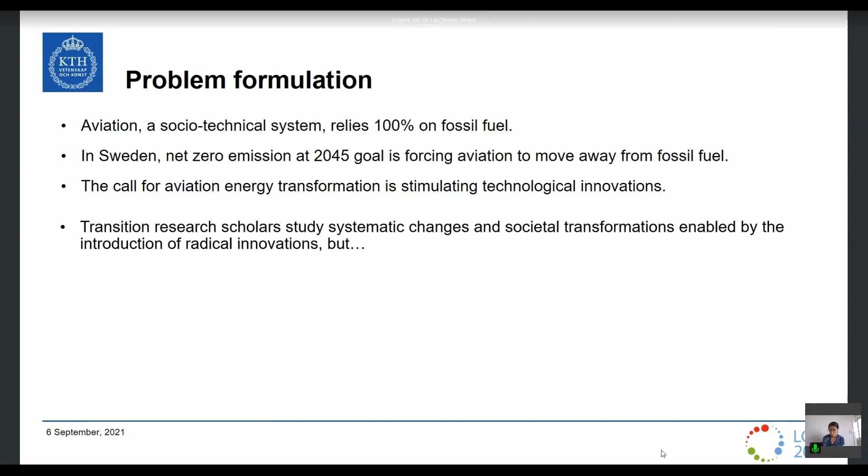With the introduction of new technology comes systematic changes and societal transformations, and these changes are studied by scholars in the field of transition research. But the scholars often implicitly assume sustainability of technology, overlooking questions like sustainability of the transition process or sustainability of any technology when scaled up, as well as potential burden-shifting phenomena.

So LCA as a method could supplement the socio-technical transition perspective by addressing these questions. In return, the socio-technical transition perspective can enrich LCA by introducing different interactions between technology and society.

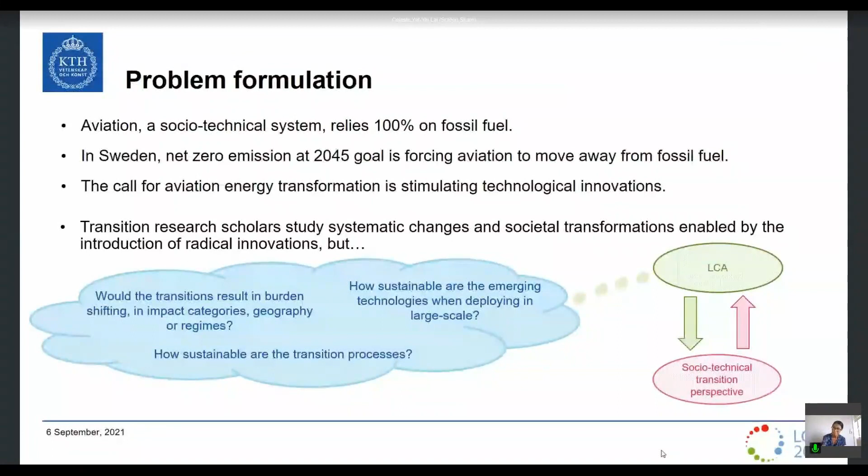Our research is to assess the potential environmental impact of the future Swedish aviation energy system in comparison with traditional fossil fuel counterparts. As an LCA case, preliminarily, we are setting out to assess the environmental impact per energy unit of a return flight over the life stages from well to wake, focusing on Sweden in the year 2045.

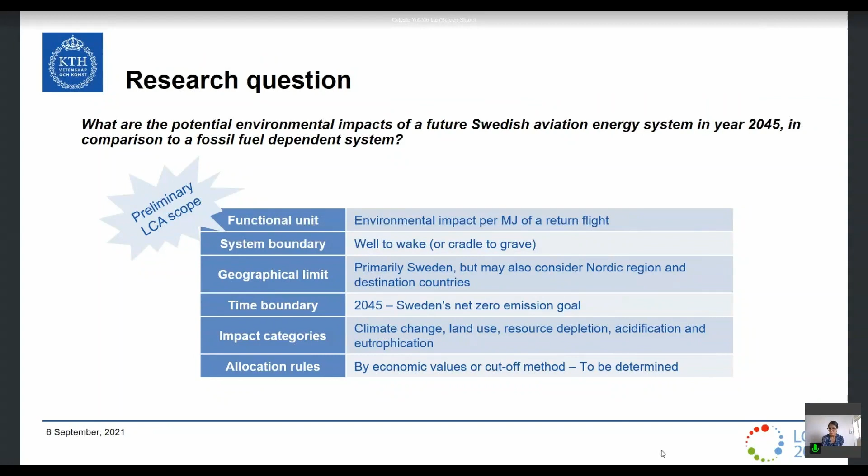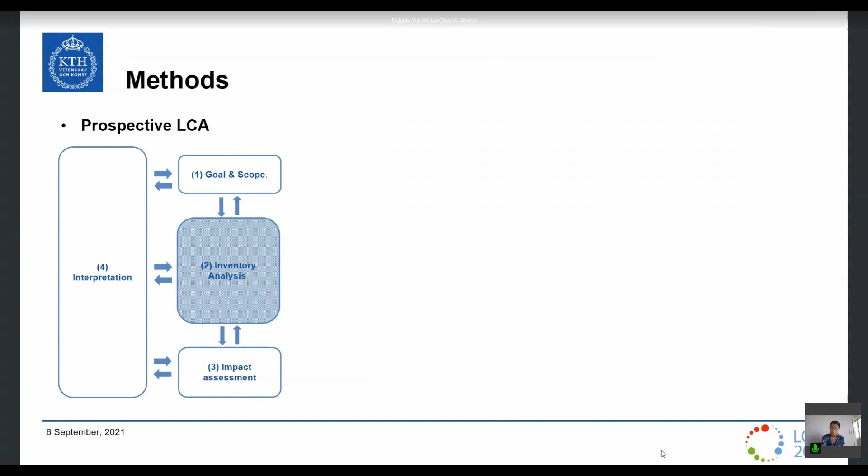Since the case is set in the future, we will be using prospective LCA. What differentiates our LCA from the conventional LCA lies in step two, inventory, where we introduce the socio-technical scenario technique to help us develop the future scenario.

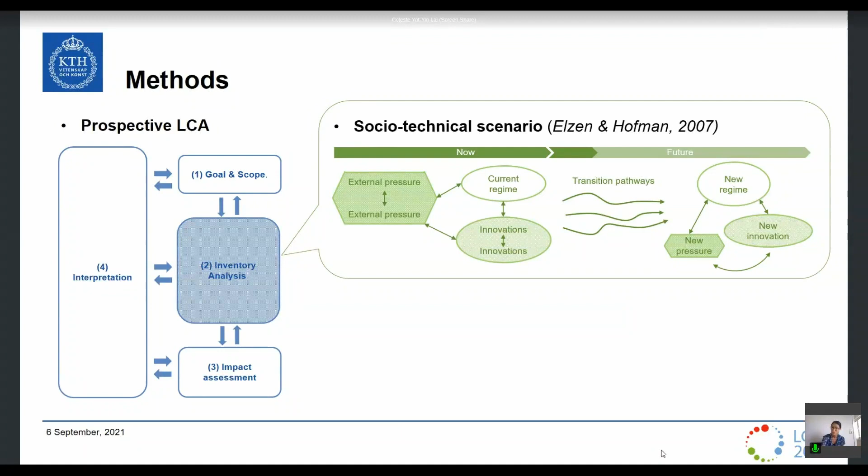This technique emphasizes the interactions between the current aviation regime, innovations, and external pressures, studying the evolution of these interactions over time until a new setting is formed. We also introduce cross-consistency assessment methods to help eliminate any incompatible relationships found in the scenario. Once we perform these steps, we will revise our LCA scope before setting out to collect data.

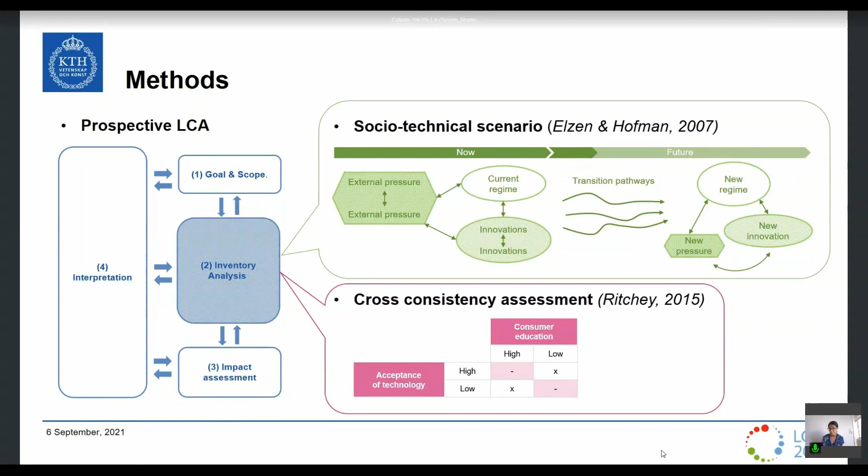To put this into context, let's look at the preliminary scenario we've developed, stretching from now to the year 2045, where Swedish aviation is supposed to be fossil-free.

At the moment, the amount of sustainable aviation fuel, or SAF, used in Sweden is minimal. However, there are a lot of ongoing R&D projects focusing on investigating different feedstocks and production pathways to produce SAF locally. But the limitation of SAF in terms of feedstock availability is also stimulating the development of alternative technologies such as battery-driven or hydrogen aircraft.

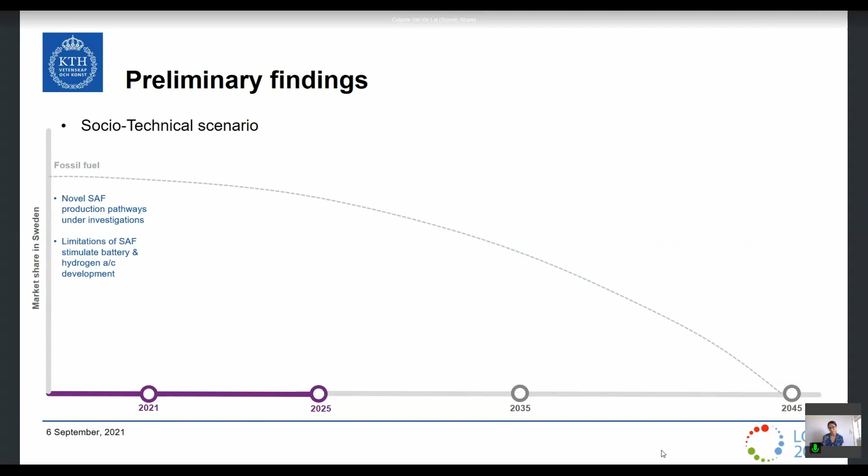From this year, 2021 onwards, we'll see increasing use of SAF in Sweden, mainly due to the government mandating the blend of SAF into jet fuel. We also see more national budget being allocated to R&D projects to encourage biofuel and electrofuel production locally, as well as electric aviation.

Customers or consumers are becoming more knowledgeable and conscious, and there will be higher demand for sustainable products, including in our aviation industry. Actors within the aviation industry are working more closely together, forming coalitions to accelerate the energy transition in the industry. The same actors, including airlines, airports, OEMs, etc., are more willing to adapt to and invest in novel technologies.

Also, we see forest-based feedstock competition across different industries in Sweden becoming noticeable at this period of time.

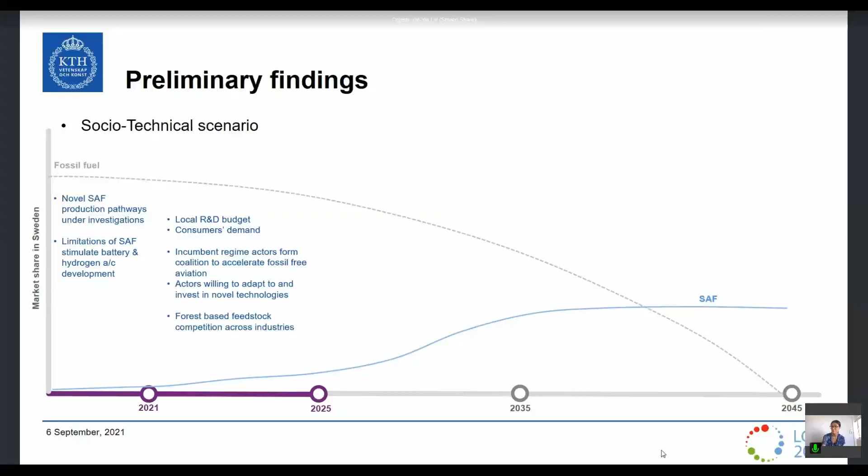Around 2025 to 2026, we will expect the first battery-driven aircraft entering into service in Sweden. Within this timeframe, we expect consumers to be more willing to pay for SAF to cover their fuel costs. There will also be large-scale optimized SAF production facilities established in Sweden, featuring the use of diverse feedstock produced in a common facility for the fuel.

However, the lack of bioenergy carbon capture and utilization governance would limit the potential of electrofuel development here, making importing SAF necessary to meet the 30% volume blend mandate by 2030.

Moving on, around 2035, we expect to see the first hydrogen-fueled aircraft ready for flight testing. At the same time, the construction of hydrogen infrastructure in Sweden is materializing, thanks to previous experience gained from different industrial sectors, as well as the EU and national hydrogen strategies.

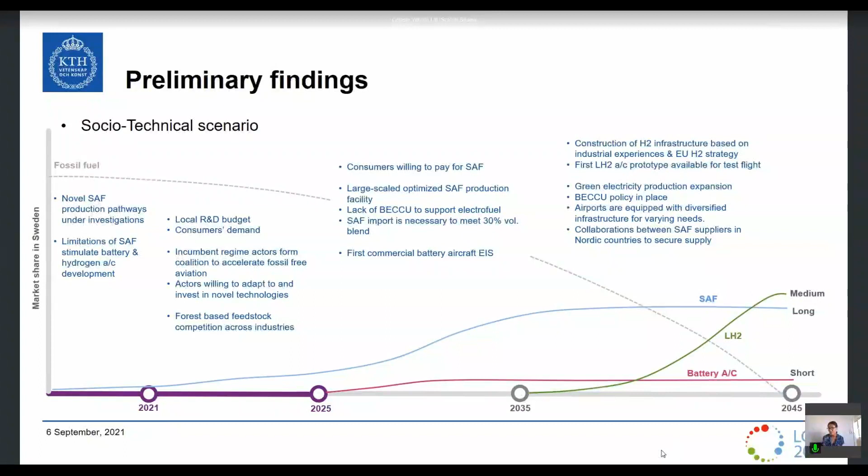Renewable electricity capacity will increase to an extent sufficient to support all demands, including fuel production. We expect the BECCU policy to be in place by then, incentivizing the commercialization of electrofuel. Also, local airports will be more equipped with diversifying infrastructure supporting alternative fuels or alternative propulsion systems.

And finally, the collaboration between SAF suppliers across the Nordic countries will be strengthened at that point in time. Based on the scenarios and expected technical limitations at 2045, we expect the Swedish aviation energy system to be comprised of three different segments: the first, short-haul, covered by battery-driven aircraft, mostly servicing northern Sweden; medium-haul covered by hydrogen-fueled aircraft; and long-haul covered by SAF.

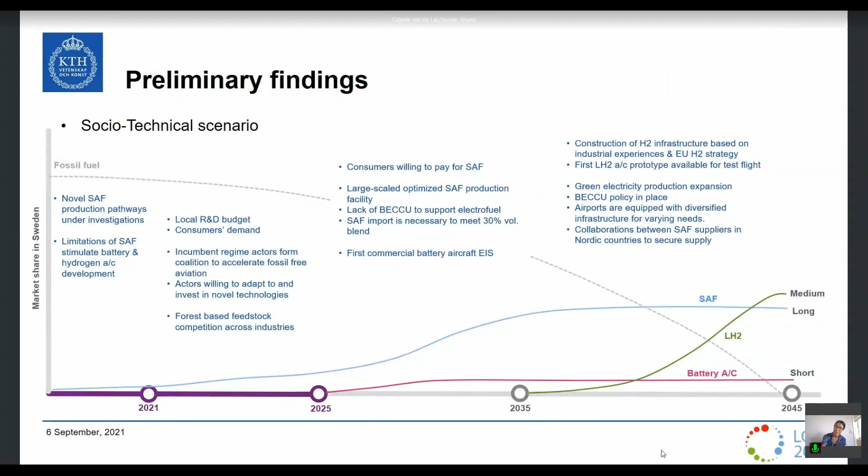Now, to illustrate the cross-consistency checking concept, we just look at part of the scenario, which is the long-haul travel done by 100% SAF fuel. So by deriving some factors from the scenario - factors that affect the production volume of SAF - and rearranging them, we find several compatible relationships.

For illustration purposes, we only look at the two extreme compatible solutions we found: the first one, assuming a very large volume of SAF produced locally in Sweden with little need to import; and second, large import of SAF with little local production.

For this scenario, we also keep in mind that there will be potential limitations in the SAF supply chain in the destination country in 2045 when we are talking about a return flight. Meaning the inbound flight into Sweden may not be powered by SAF.

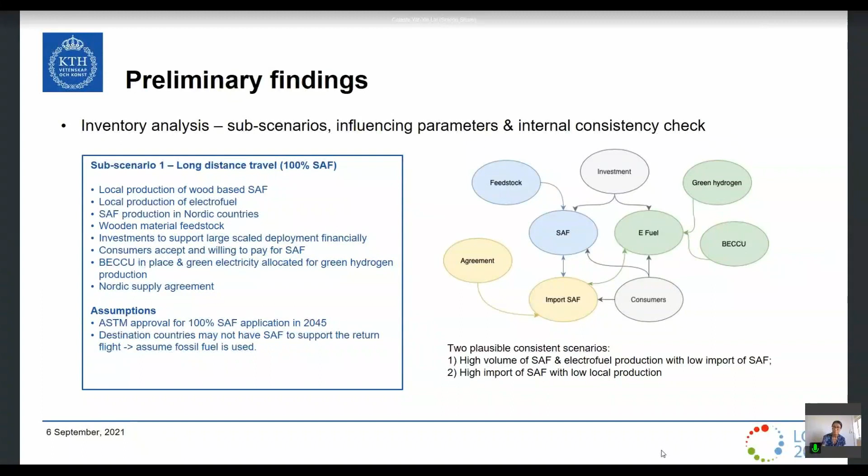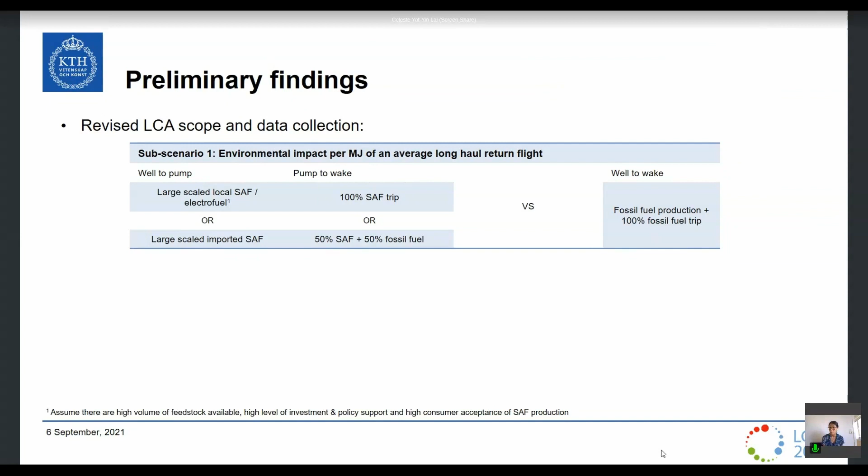So with this revised scenario and data, we now look at the revised LCA scope. From the well to pump stage, we consider either large-scale local SAF production or large-scale imported SAF. From the pump to wake stage, we consider either the entire return flight powered by SAF, or the outbound flight by SAF and inbound flight by fossil fuel, contrasting to the conventional aircraft flying the entire return flight with fossil fuel.

So for data collection, we'd be interested to collect data on SAF production technology in Sweden, as well as other Nordic countries. We would also need to look at data for the upscaling of both fuel production technology and the underlying technology.

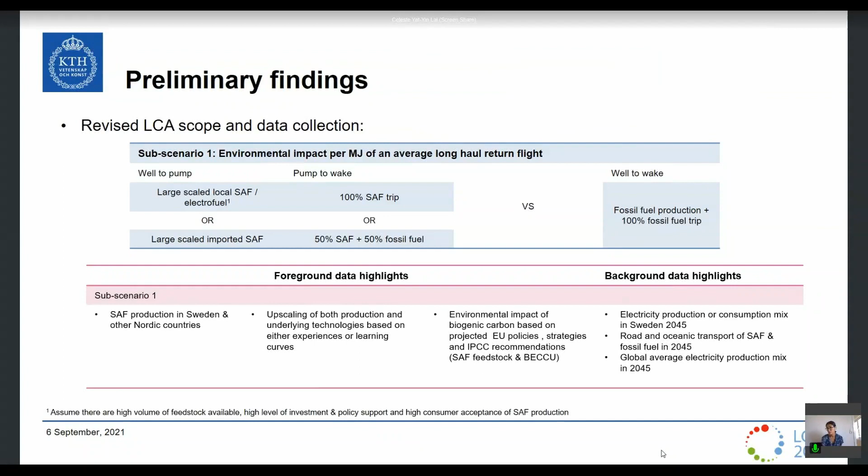So to summarize, by integrating LCA with the socio-technical perspective, we expect to gain better understanding of sustainability transitions by capturing the impact of underlying technological processes and technological upscaling, as well as potential burden shifting phenomena. From the LCA perspective, we expect to gain better insights into the influences of other sectors, potential impacts of alternative solutions, and potential impacts of a system that depends not on one but multiple emergent technologies.

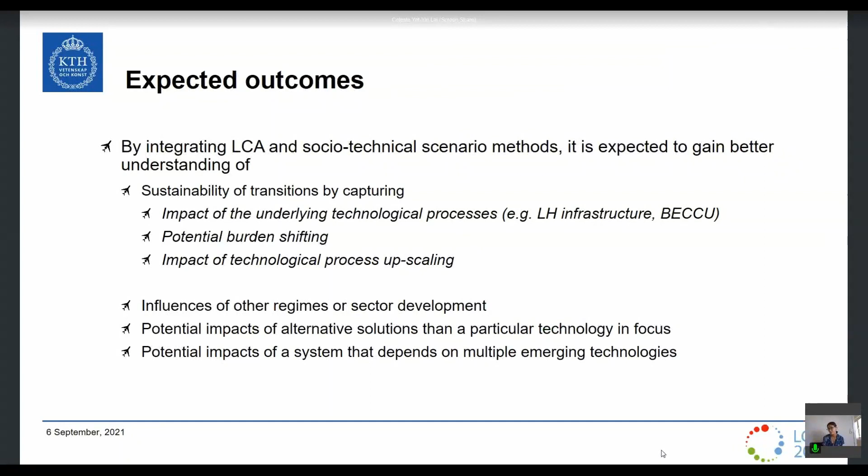So with that, I wrap up my presentation and thank you very much for your attention.

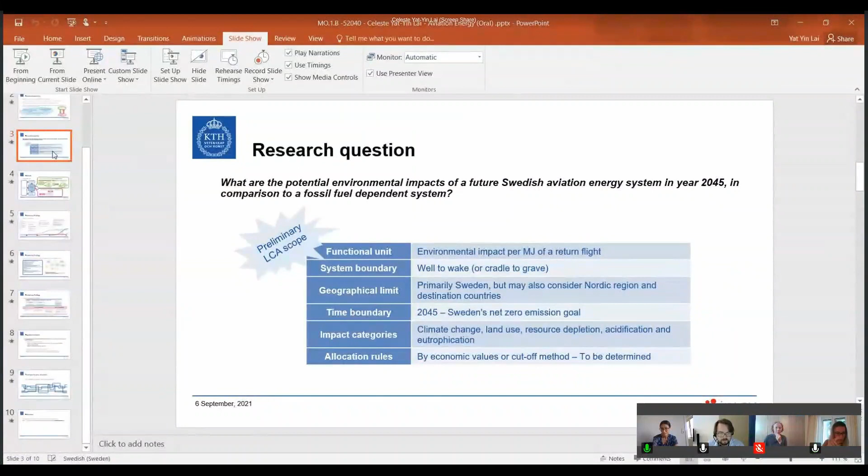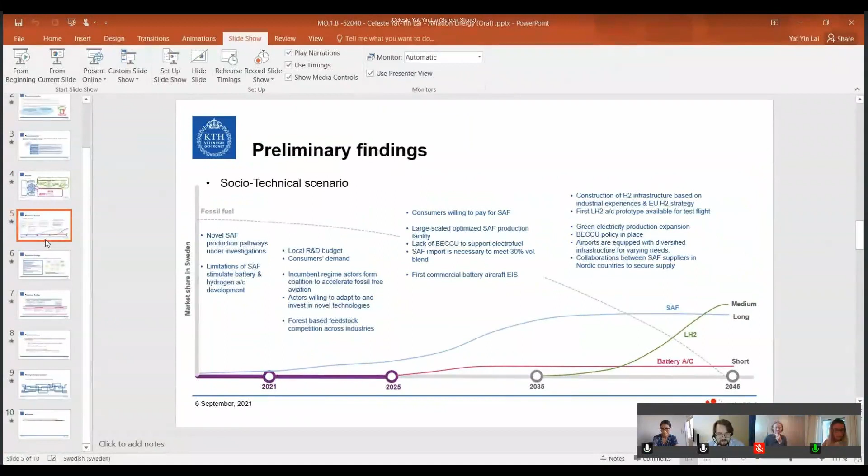What is going to be the parameters for you? Do you mean the slide for the LCA scope? We cannot see your screen - are you sharing it? I can share, just give me a second. Because you are including the social aspects as well, along with the environment, I would like to learn more about it. Are you talking about this one? No, the next one, the fourth. This one? I don't... the fifth. I don't remember, but I remember the graph. No, I don't know which one.

This one? Actually, my question is how we are going to - what is the parameter, how are you going to compare to get this result? It's more a concept, the quality, or are you going to - this is not clear for me. How are you going to conclude this, to compare, to put everything on a scale? So do you have like a matrix where you say, okay, this is more important? So for the aviation industry, is it the social or the environmental aspect? How are you going to measure this?

This is it, I think I understand your question. So more or less, the technique here is how to develop, how you evolve into the future. As I would be doing an attributional LCA, at one point in time - here, 2045 - that's where I want to do the assessment. And at that point, why do I choose a certain technology to assess? That's based on the development of society and the different rules or regulations that come in, and that dictates what I'm going to choose for my future scenario. That's what this is all about. So I will probably not be measuring anything from society, but society is what's driving us - we need some import of SAF. So if I do a traditional LCA, I'd probably just focus on large-scale production of SAF in Sweden, without considering that part of it is actually coming from somewhere else because there's not sufficient feedstock A or B to produce the amount of electrofuel or biofuel based on whatever regulations we are looking at. That gives me the direction before I can put it all together and compare with fossil fuel. Okay, if that answers your question.

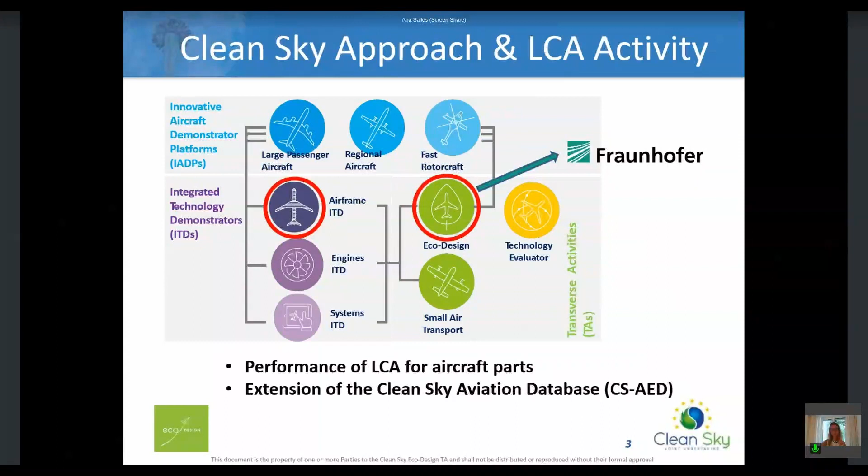And this interface between the eco-design, where all the LCA data have been delivered, to the eco-design platform led by Fraunhofer, where the eco statements or the LCA for demonstrator level have been performed. So this work is part of the airframe platform that I'm presenting today. It's called Ecotech, and the partners you can see on the screen.

Capgemini and the University of Stuttgart and Fraunhofer collected the data from the partners, the industry partners, and also from the advanced research institutes.

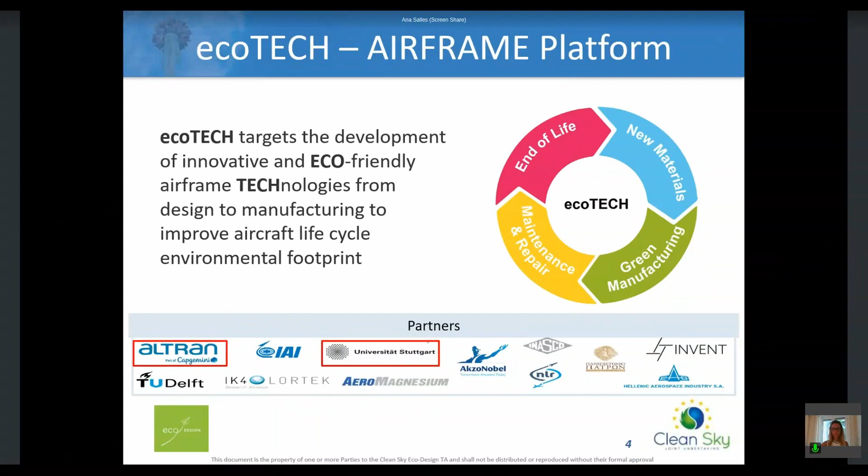And the main demonstrators that we are working on are from the cabin interior, such as drawer box, handrail, and the seating structures, and the fuselage panels, and the wing.

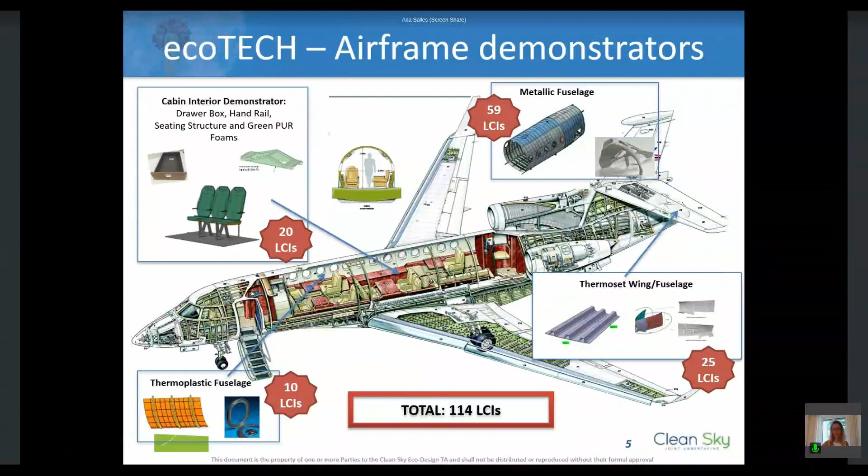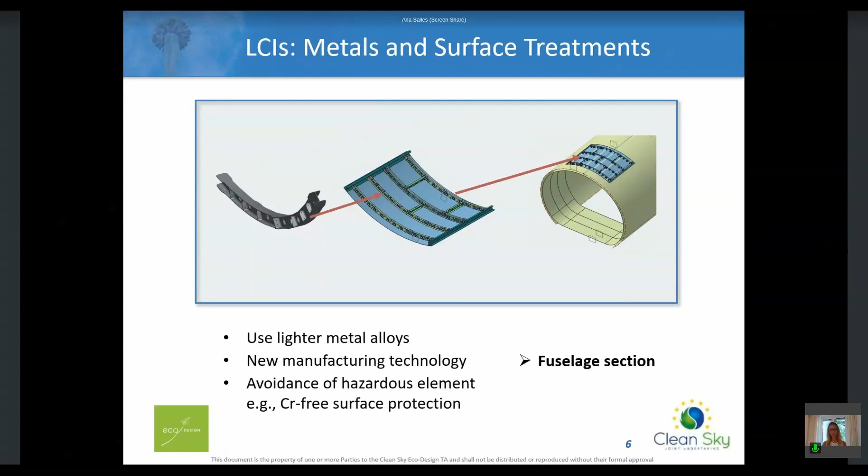For you to learn more about those new LCIs: for metal and surface treatment, for the production of fuselage sections, there are lighter metal alloys. These are not really from gate to gate, but from the production of the new metal alloys. From gate to gate, we have new manufacturing technologies, improvements of some existing ones or new ones. For surface treatment, we have collected data for those avoiding the use of hazardous elements.

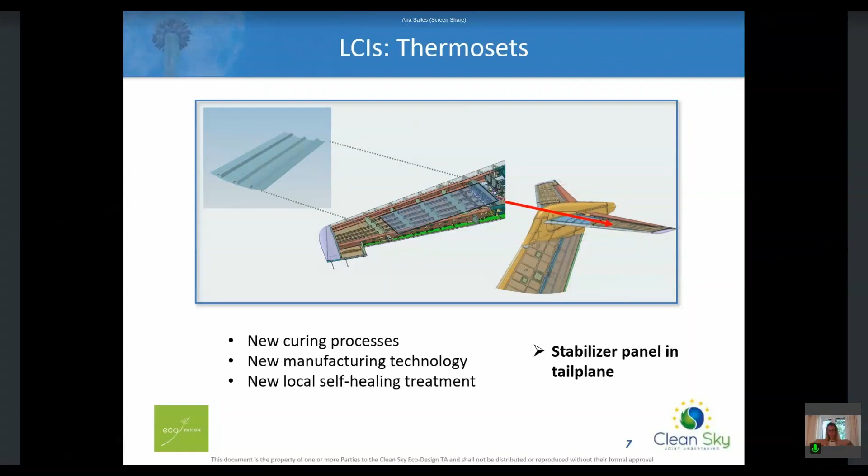For the thermosets, for the production of a stabilizer panel in the tailplane, for example, the data are about new curing processes and new manufacturing innovations. There's a lot of innovation for manufacturing technologies, and the local self-healing treatment is quite new - instead of changing the entire part, you just repair the damaged part in this component of the aircraft.

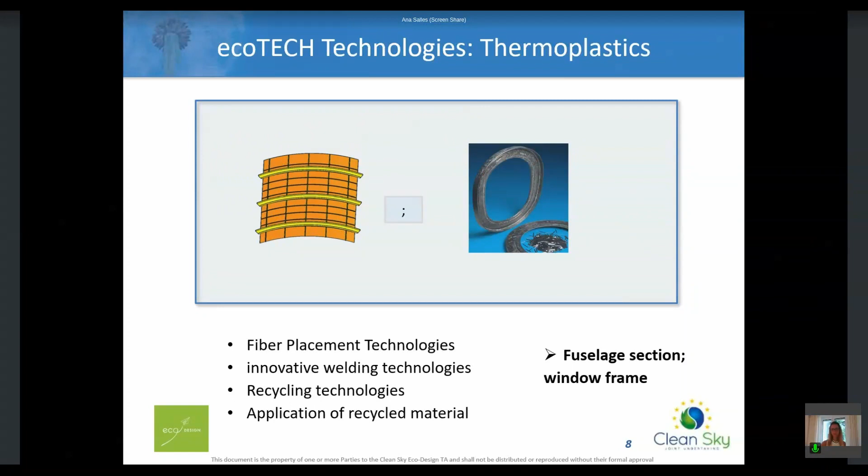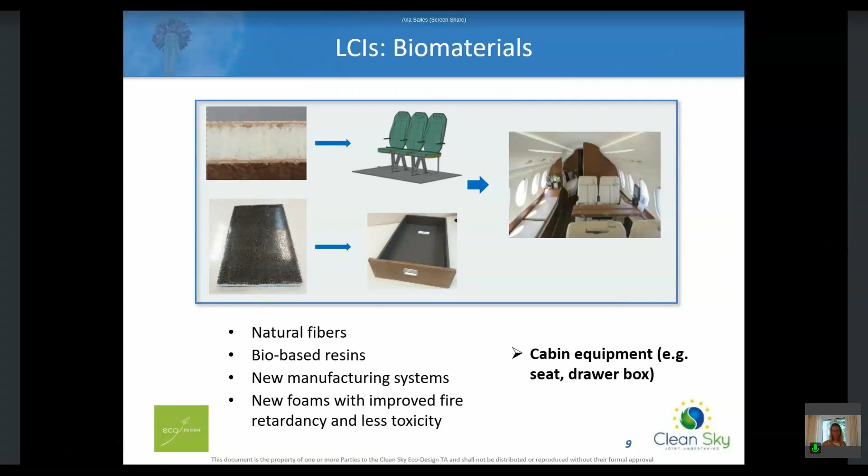In conclusion, what is very important for us is the continuation in the creation and extension of this Clean Sky Aviation environmental database, which allows the industry to really introduce the eco-design concept before and during the eco-design phase. This is one of our main roles here: to support the aviation industry in keeping track of that, to increase this environmental awareness.

In the first part of the project, Clean Sky, it was more about learning from each other - the LCA experts and the developers of the technologies and parts worked separately, and then we learned from each other and had a lot of lessons learned. Now in Clean Sky 2, we are improving that, and since we are in direct contact with the aviation industry partners, we can produce a database with robust and good quality.

One of our main challenges: we are comparing the technologies with reference technologies, which are at TRL 9. We are working on collecting data that are sometimes at TRL 3 or 4, but most of them have to reach TRL 6, which is better. So this is something we are facing and working to improve.

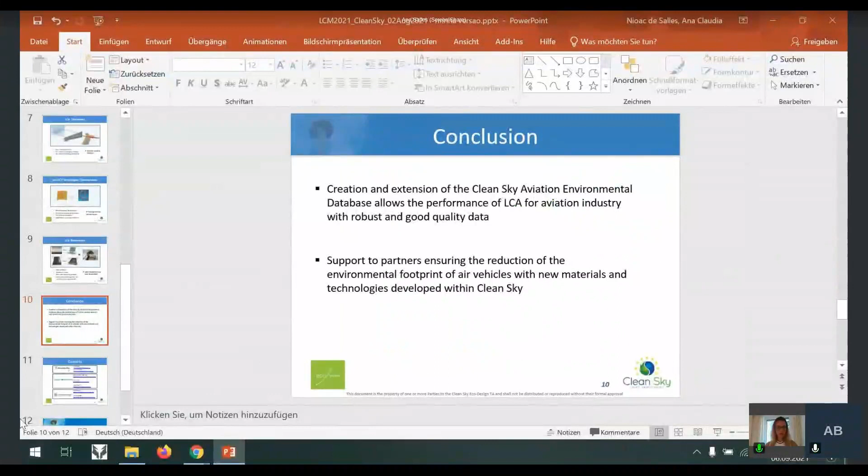Okay, so it's my fault. I thought I was waiting for that. Yes, I'm sorry, I saw your conclusion slide, so I wasn't going to interrupt you. I'm very sorry. No, okay, but I'm done. That's why I was talking, I was taking advantage of my time. I understand, but thank you very much for your attention.

So I'm glad to discuss with you about the quality and the challenge in producing, creating LCIs from the lower TRL. This is what I would like to take advantage of, talking with the LCA expert here. It's quite great, thank you.

So I think you're still sharing your screen. I don't know how you unshare now. But we have... that's what you...

In the meantime, we have two questions from the audience already. One is from Celeste, who did the presentation earlier, asking whether this database is actually available to the public as well, or whether it's just available to aircraft manufacturers.

Yes, this is a very, very good question. Thank you. Because in this, there are 70 parties that this data belongs to. For example, Airbus, and they share with us their data. Up to now, this first version of the database belongs to these parties. I will check this, because I guess now we are able to sell them. Please, I will write to you by email or find out, and then I will answer you.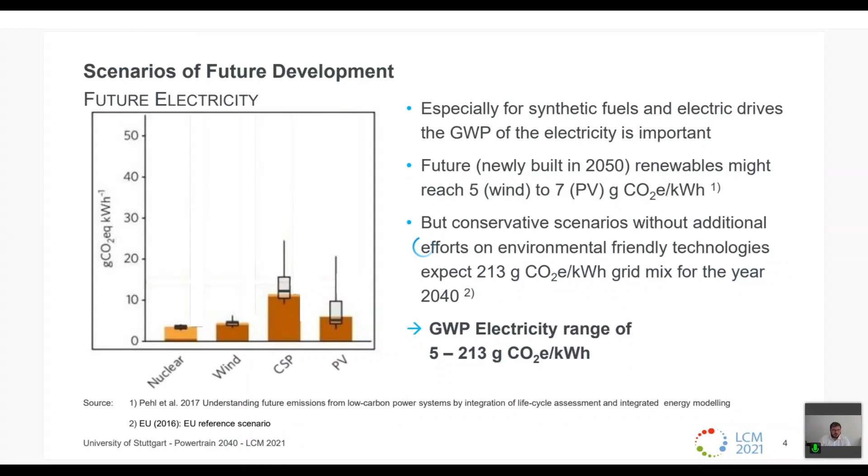Next question - what often happens in studies looking to the future is that they use nowadays LCA databases, make the production for a vehicle, for example, and then evaluate future consumption. But also, most likely, the production of the materials will change in the future. So as we could not do a really thorough look into how the future materials...

Presentation is hanging - or are you still on slide 4? I think you changed, right? Okay, now slide 5? Yeah, now it's fine. Okay, thanks.

So how about future materials? We said let's do it a simpler way - we already have the evaluation for the electricity. So what happens if we take today's aluminum production and just replace the thermal energy and electrical energy with renewables? What will happen to the environmental impact or potential of the aluminum production in this case? This is the example for aluminum sheet.

So first, we're looking at today's mix. Then we replace the thermal energy and electric energy. And just by replacing the thermal and electric energy, we have a total GWP reduction of 78% less.

Depending on the material, the savings by using renewable electricity in today's material production is 20 to 90% compared to today. So also at this part, we tried to look at how would the material look like in the future.

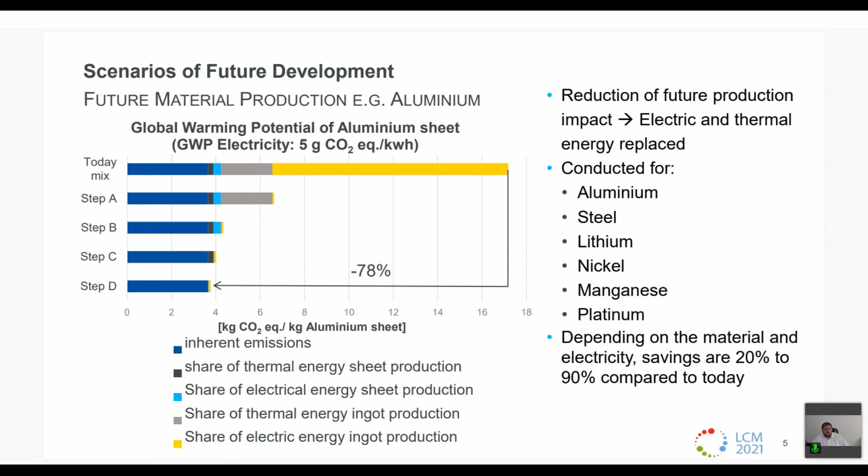Status quo about the results, setting the scene for what the results are about. As we are halfway through the project, the results of the production and use of the vehicles are only partly final. Some parts, like the battery size, will be adjusted finally after the consumption calculation, because we have a fixed range for any vehicle, and after the consumption calculation is done, we will fix the battery size likewise, also like the tank sizes.

So the results on the next page are rather an order of magnitude of where we're looking at.

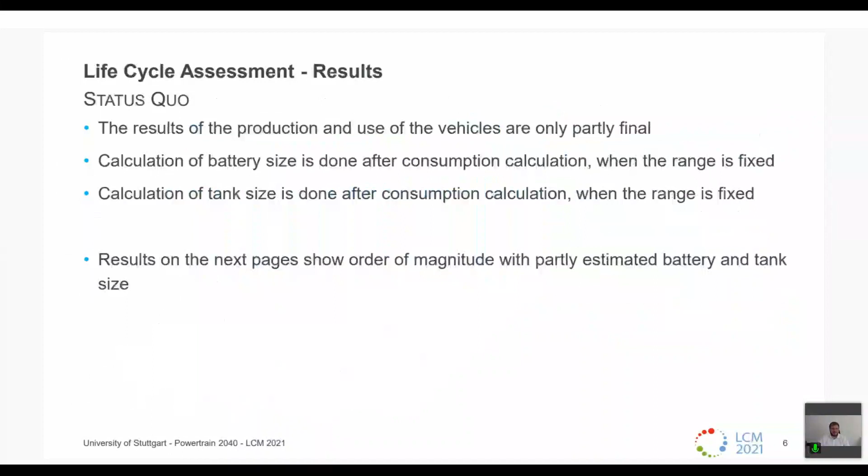So now the system itself, when I click on the next slide, shows me that it's working. I see the nice round thing which changes, but the slide doesn't change. Okay, now hopefully you see nice slide number 7, a nice graph. Okay, very good.

Now you will see the same slide, but with 213 grams CO2 equivalent per kilowatt hour. Obviously, also the production of the vehicle changes.

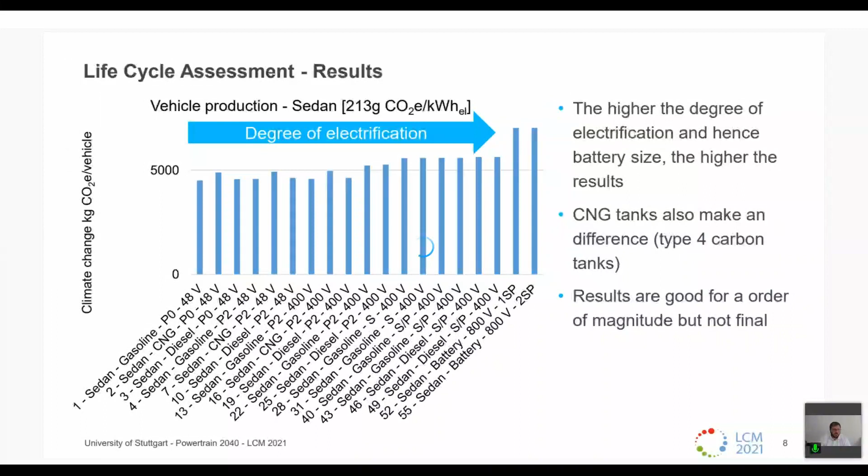How about the fuel production? Again, we're talking about the year 2040, we're trying to evaluate. So we took a look at future projections for synthetic fuel production.

On the one hand, with battery electric vehicles, you have high production efficiency and some losses, which you see in the charging efficiency. And for hydrogen, methane, gasoline, and diesel, we evaluated expected future efficiencies of producing the fuel, also including liquefaction and transport if it would be done in MENA.

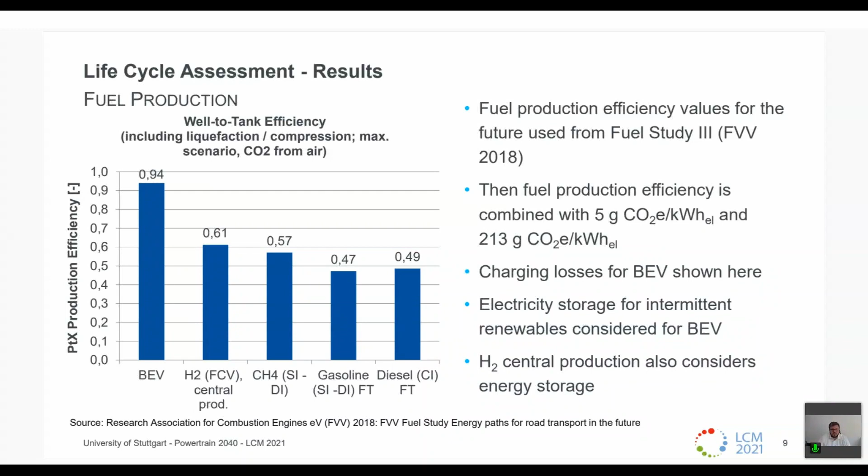So the electricity for the battery electric vehicle and the electricity for producing hydrogen centrally is sourced in Europe, while methane, gasoline, and diesel are produced in this evaluation in the MENA region and transported to Europe. This is the expected scenario for the year 2040, using these efficiencies combined with our electricity assumptions as I said before.

This is the first result. Obviously, you can see the battery electric vehicles and some of the variants are missing already. But what is visible when we talk about such a low global warming potential of the electricity is that the production of the vehicle gets really important.

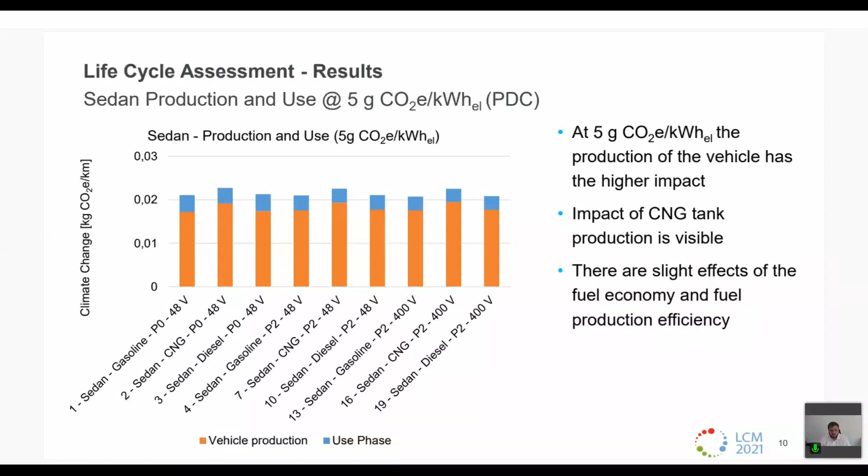Two minutes remaining, thanks. So in the future, we have to spend even more effort on taking a look at the production of the vehicles, and also evaluating expected future production when talking about 2040, 2050, or whichever kind of data.

This is the same result as on the last slide, but I changed the y-axis because now comes the results with the 213 grams CO2 equivalent per kilowatt hour. The production of the vehicle is still the same, but obviously the use phase changes.

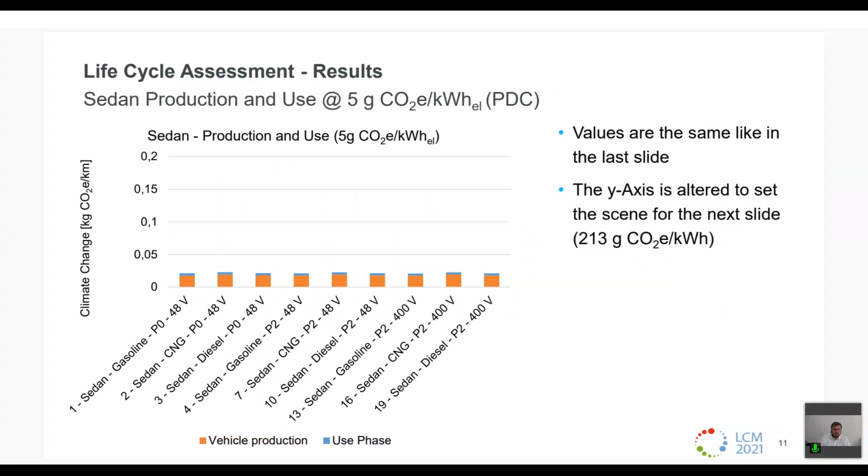You have to jump back and forth again. The slide is hanging again, unfortunately. I'm sorry. Now? Do you see slide number 12? Okay.

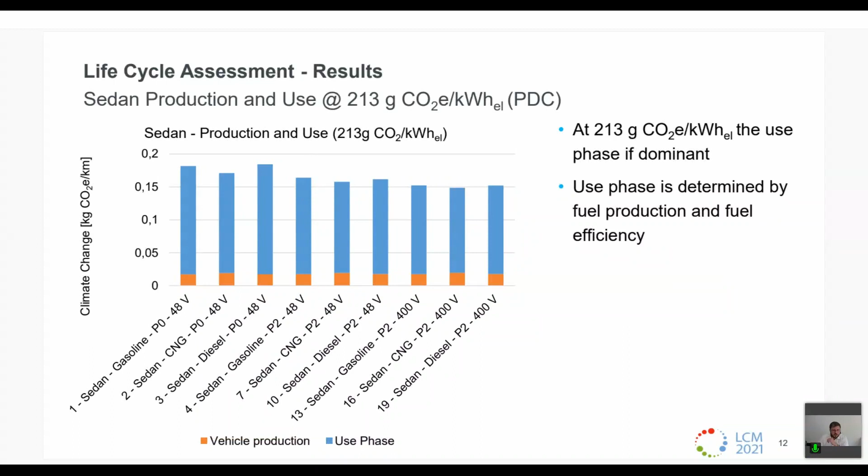So obviously the use phase of the vehicles gets way more important at 213 grams CO2 per kilowatt hour, though the production is still visible. One thing, this yellow light bar—which hopefully everyone is seeing because the slide changed—is indicating the range of fossil fuels. So if we talk about the future at 213 grams CO2 equivalent per kilowatt hour, we emit more GWP emissions with synthetic fuels than we would do with still using fossil fuels.

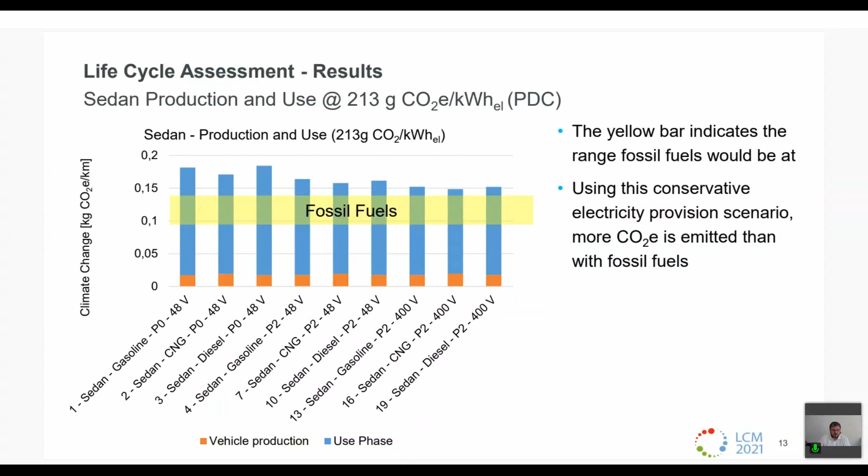This brings me to the conclusion and to the next result: first of all, we need a high amount of renewable electricity for a low GWP electricity provision. Otherwise, synthetic fuels and other measures are not really worth it.

Depending on the scenario, if we reach a really low GWP of the electricity, then the production phase of the vehicle gets really important. This is another result where you can see that today, production makes up only some part of the overall life cycle, which might change in future when we get to lower GWPs.

To summarize, more powertrain concepts will be evaluated soon, so this is work in progress. As I said before, various vehicle concepts—totally 57 concepts—and the results will be published in an open access report.

This will be planned for mid next year via the FVV—the Forschungsvereinigung Verbrennungskraftmaschinen, the research association for internal combustion engines here in Germany. This will be a public report written in English.

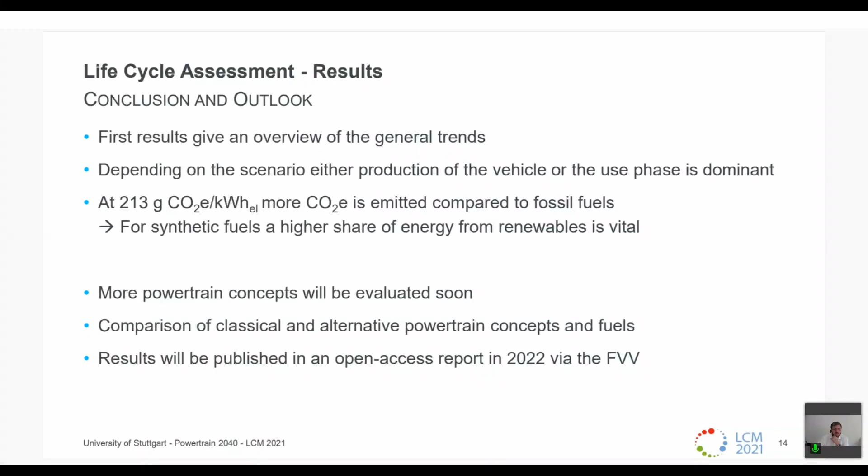So I can see there's one question by Celeste about the future material process. Right now, for most of the materials we only took a look at replacing the electricity, because that was a simple way of getting into the future and getting good results with, let's say, limited effort, because we cannot do large things in this project.

Only for steel did we evaluate steel mills with hydrogen, because obviously in a steel mill and blast furnace gas, the share of electricity-based GWP is really small. So for steel, we assumed, I think, 70% less GWP in 2040, based on most steel mills having already changed towards using hydrogen.

Any more questions? Yes, well, maybe a remark. I have done a similar thing in the past, let's say—for steel specifically, or for other materials, I think it's the same thing.

What my findings were: if you basically transpose everything into the future, it depends on how carbon neutral you assume the electricity to be in the end. I mean, if I put zero in, because I said basically if I can get the electricity free of charge, I can also produce the materials free of charge. So if I then look into steel, what I find as remaining CO2 emissions is usually all the minor constituents that basically add up to 5-10% today, like the auxiliary materials, which are then basically driving the emissions. But wouldn't I need to assume that these materials will also change in the future, because their electricity and energy supply chains will change as well, which would lead to a much larger CO2 saving than is actually anticipated?

So I guess we can hand over to you for the last presentation. To me, yes, one second, let me pull up my presentation. Let me just see how I do that most efficiently. And your camera would be super nice. Yes, let me try. Yes, screen, do you see my screen? Yep, should be okay, let's do full screen for everybody, so everybody should be able to see my screen in full now. Is that correct? Yes, well I can't see anybody's, so maybe an oral feedback would be good. Looks good. Good, perfect.

So yes, my presentation is about integrating design for environment to achieve carbon neutral mobility.

In essence, what we've done in the past is kind of a lot of similar studies to what Elle just presented in the previous presentation. So we looked at battery technologies and improvements, especially with my former employer IAV, who also contributed a lot of the basic results we've used for this study. And we asked ourselves, what does this actually mean for an entire fleet, and how can an OEM employ that kind of information usefully to manage CO2 targets?

So maybe this slide to take off: we are currently in kind of a predicament that the European Commission, or basically we all, have set ourselves the target to reduce global GHG emissions by 95% until 2050 compared to a 1990 baseline. The challenge, as we also announced in the previous slides, is that actually we didn't go in the right direction in the past couple of years, but rather increased compared to 1990, then decreasing. That's actually true across all transport or means of transport, including aircraft, passenger cars, and everything.

And on the other hand, we are in the situation where we're reporting kind of an achievement. We basically reached a fleet consumption of 120 grams per kilometer. The automotive industry has introduced hybrids, engines were downsized, downspeeded, electric vehicles were introduced, and now we start announcing that fleets will be fully electrified. There are also CO2 targets and goals being announced by OEMs, like minus X% by 2035, or being carbon neutral by 2050 minus some number of years, which ranges between 5, 10, and 12, so depending on the OEM, the X can be a different number of years.

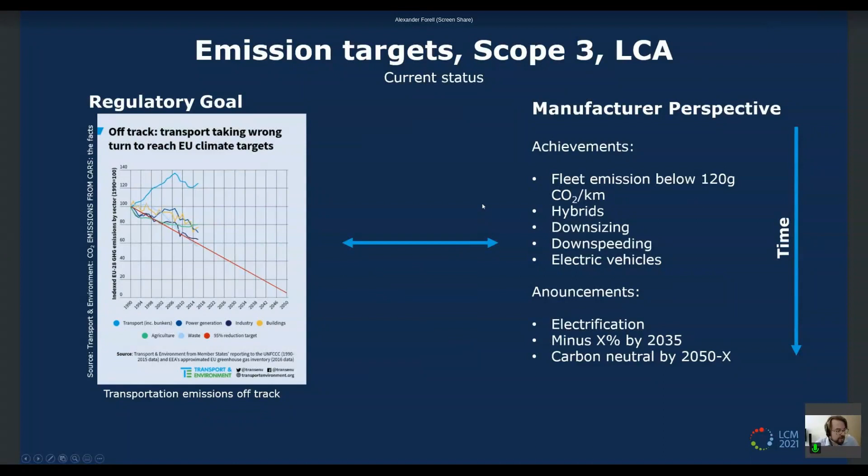So the question is, or let's phrase it the other way: is the way we are currently doing scope 3 calculations in the automotive industry helping us to actually achieve this red line, or is it not going in the right direction if we do scope 3? So let's have a look at how we do scope 3 calculations today.

So what we typically do is calculate an LCA of a vehicle. Then we go to the sales department and get a breakdown of markets, segments, and sales, and then we multiply the results of the LCA with the markets and segments. We get a grand total, and this grand total we sort into the different scopes.

So scope 1 and 2 is obviously what happens at the OEM site. Scope 3 category 1 is purchased goods and services—this is basically the entire production stage of the LCA minus scope 1 and 2. Scope 3 category 11 is the use phase of the vehicle, and then we have category 12, the end of life.

So it's just a different sorting of a scaled LCA result, if you like. Let's walk through this exercise and see what kind of results we would get if we take a sample OEM who is actually selling in 3 different segments.

In 6 different markets, and in each market we assumed a development of the powertrain. In this case, we only looked at 4 powertrains: diesel, gasoline, a plug-in hybrid, and a BEV, because these are the ones which make the most difference. We also wanted to keep the study simple and not discuss so much about the numbers, that's why everything is relative.

What you see here is the resulting share across all markets of powertrains that have been sold. We start with a fairly high share of gasoline, and then we introduce BEVs quite rapidly. In 2050, we will only run battery electric vehicles in all segments and phase out all the other technologies until then.

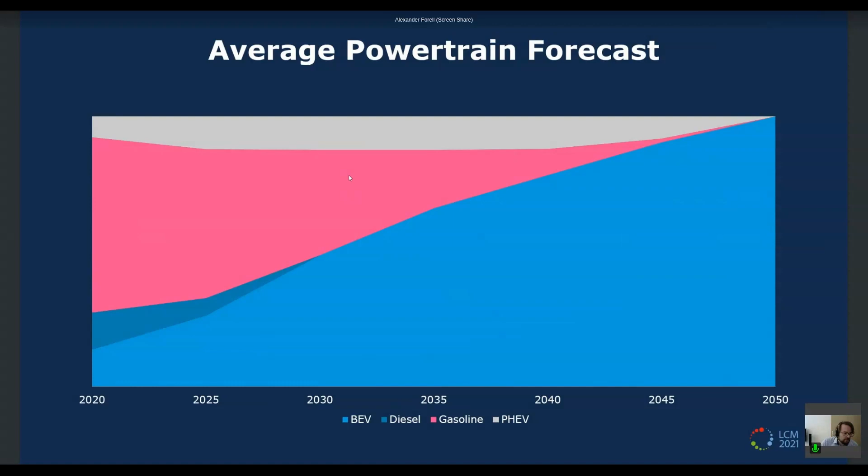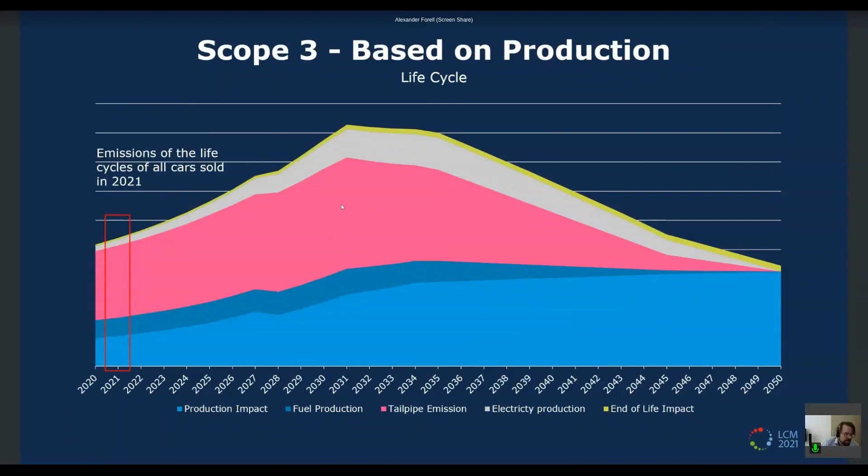Let's look at the next slide, where we have broken down these tailpipe emissions into the different markets we are selling. If we look at the European market, this actually doesn't look too bad. We have it basically steadily going down until 2050.

We also assume that the electricity grid mix is improving until 2050, and is, in a simplified case here, zero in 2050. But we can also see that in these growing markets, we will reach the peak of the tailpipe emissions significantly later as the number of vehicles increases. So if we just look at the European market, it actually doesn't look too bad.

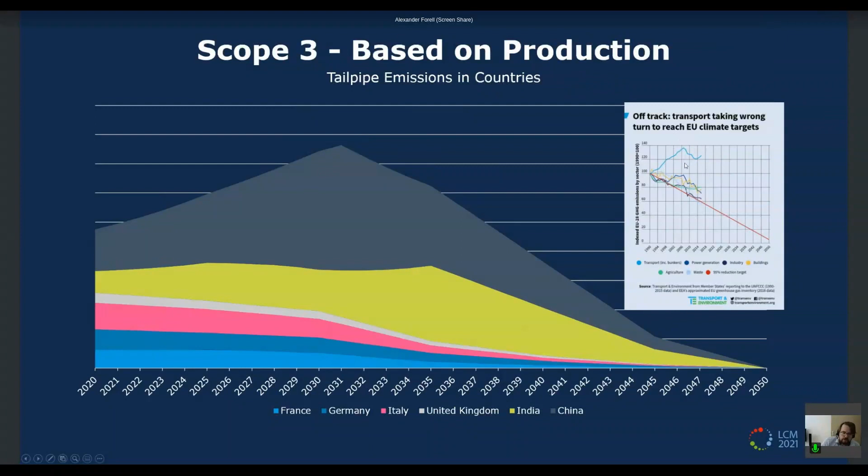We are basically on the red line, but are we really? The answer is no, because what is this graph actually showing us? This graph is showing us the average of all vehicles registered. So basically taking our approach as we take it today, to take the vehicles we produce, the fuel production, the end of life, and just taking that in each year where the vehicle is produced, is not going to cut it.

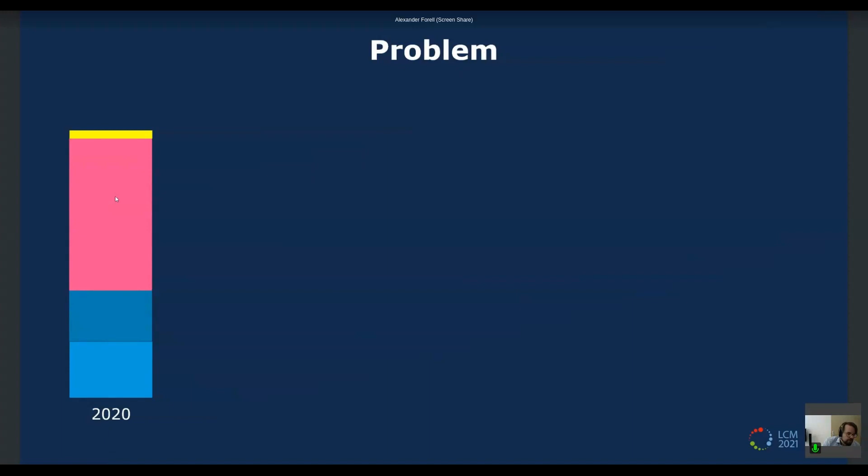Because what happens in reality is that we have a vehicle that is produced in 2020 and it will emit CO2 for the next 20 years, until it is finally disposed of or recycled in the year 2040, which means we have a very long way to go with these technologies.

And if we try to incorporate this into the simulation, the picture is looking a whole lot different. So this is the same image with the same new vehicle registration, so the light blue bar for the production is exactly the same. But what we did is we artificially built a fleet from 2000 to 2020, so that we have basically a current market split in the market today.

And then we rolled it into the future, assuming that every vehicle registered has a lifetime of 20 years. This means if we have gasoline vehicles being registered in 2030, they will still be running in 2050. With the split that we assumed, we are actually seeing that we still have significant CO2 emissions on the road in the year 2050, and we are not meeting this expectation.

So what I'm aiming at is we should try to make our CO2 or scope 3 calculations consumption based. So basically looking at the fleet as it is in the market today and take these emissions into account, rather than assuming that the vehicle is produced today and runs all its 200,000 kilometers lifetime in one year.

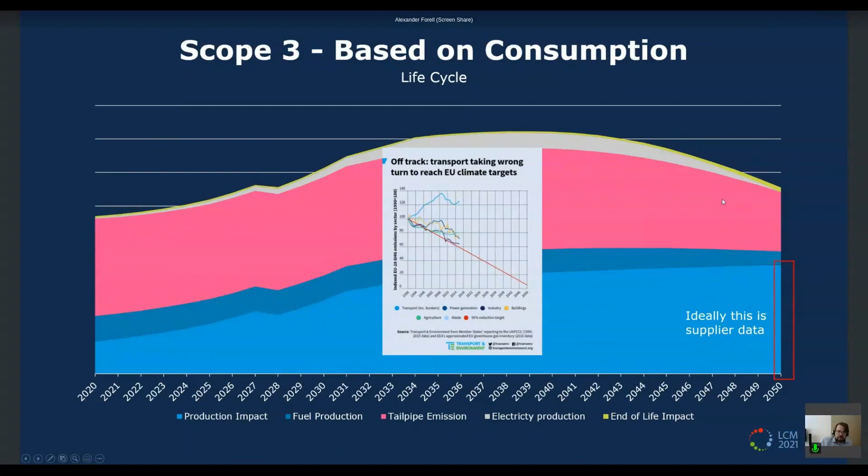So maybe conclusions from the study: we will still have ICEs in 2050. There will probably be no way around e-fuels or biofuels in some kind of form. And also, if we look at the production stage, some kind of supply chain management will be needed.

And this is actually what we've been trying to solve at Makersite, in the sense that we build a platform, or are building out a platform, that uses a bit of a different data model than a traditional LCA. So what we are doing is we introduced, next to the terms flow and process, a product or component. We call it product in the software, but in the end you can imagine it as a vehicle or a component.

And then this component exists independently of how it is manufactured. So basically every component can have one or two manufacturing processes, or three or four or whatever, and these can be supplier specific. So you can basically ask your supplier for the manufacturing data of this component.

And then what we do to calculate scope 3, instead of taking the LCA result and multiplying it with the sales numbers, we go into the sites and the transactions. So we look at what these sites have purchased from which supplier, and then we can sum up the transactions and calculate the scope 3 of purchased goods and services, and the scope 3 usage we will still calculate for the vehicle sold.

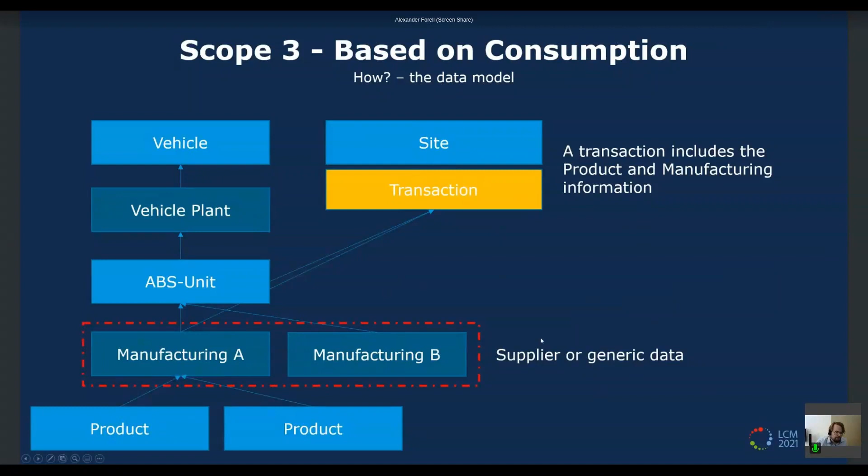But like this, we basically get a manageable account on the supplier data. And the advantage, since this is basically a digital twin technology which integrates with the systems, is that the data we collected from the suppliers are also available to the design team. So if you do an LCA study, you have supplier specific data available, and you can use it to calculate the scope 3.

So we are looking at all the same data foundation, and we can make sure that there's basically no gap between the scenarios you calculate in the LCA and what comes out in your scope 3 calculation in the end, and what actually regulatory bodies expect from you.

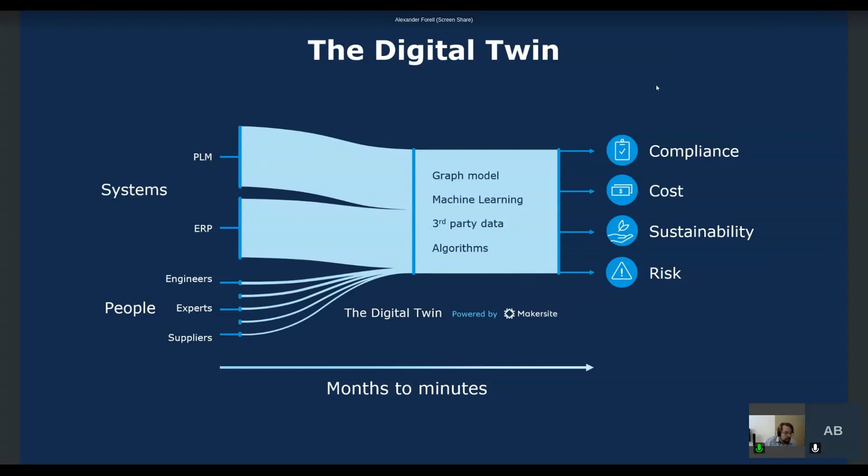Dennis' question, this is probably directed to you. Did you have a look at hydrogen and synthetic fuels?

Yes, well we had not in this study because we wanted to have a simple result, but of course I don't know whether this was maybe even regarding it, but we also of course did scenarios for hydrogen and synthetic fuels.

I didn't want to present it here because the time frame was so short, but if you're more interested, we've done a similar presentation, not from an OEM perspective and not so much about making it actionable. My former employer, IAV, did a presentation last year and the year before at the Vienna Motor Symposium on how this applies to fleets, with scenarios regarding improvement of engine technologies, different fuels, fuel cells. So there's much more detail there, since those presentations were like a one hour slot. If you can, you can also ask my co-author Christoph Danzer for more feedback on that.